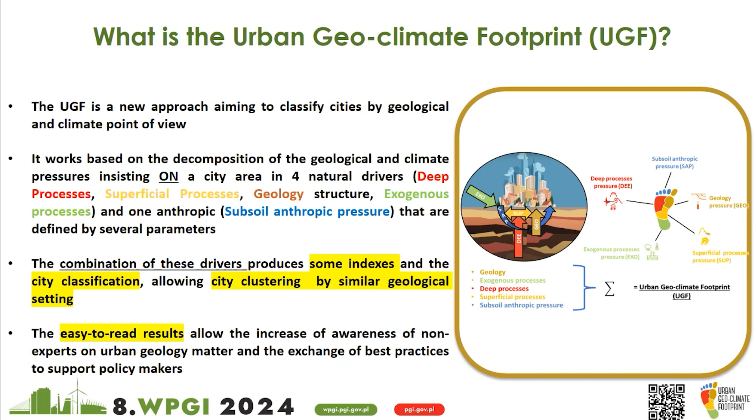The combination of these drivers produces some indexes and the city classification, allowing city clustering by similar geological setting. The easy-to-read results allow the increase of awareness of non-experts on urban geology matters and the exchange of best practices to support policymakers. So this is more or less a synthesis of what the urban geoclimate footprint is.

How it works: right now the tool is a common Microsoft Excel spreadsheet, pretty complex, but basically a spreadsheet. We have 7 different sheets. You can see the blue in the diagram represents the sheets of the tool.

The user navigates between the sheets and, guided by the glossary, defines the 22 parameters that are to be attributed in the tool. The final result is the city geofact sheet.

So you have not maps, not something to be used by an engineer or in a project. We are generally defining the geological setting of a city. You have a fact sheet, a user-friendly document synthesizing the calculated indexes, the geological setting, and the level of geological pressure on the city, ready to be shared with the public.

This is the city geofact sheet. This is an example for the city of Rome. You can see that there are some very simple descriptions of the geology or the city setting, some very general data, some maps, some cross-sections or 3D model.

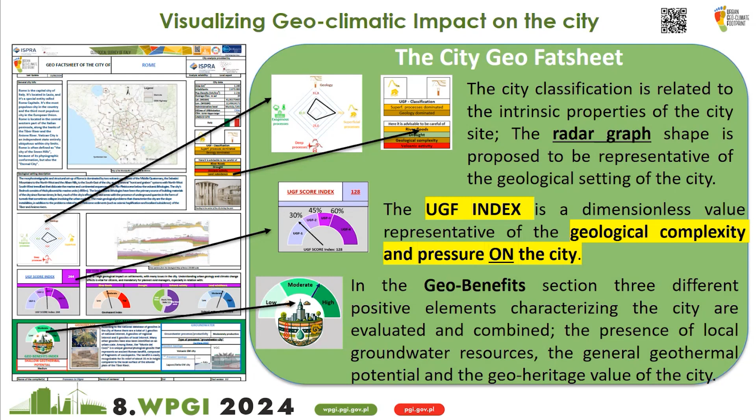Last but not least, in the latest version of the tool, we now have this space at the bottom that shows the geo-benefits. Why? Because we want to highlight that geology is not always a problem for the city, it can also be a resource. So we highlight here 3 main elements characterizing that city: the shallow geothermal potential, the geoheritage existence in the city, and the groundwater potential of the city itself.

This is the result right now of the analysis made across the European continent. You can see we have 41 cities analyzed across Europe, and the cities are pretty spread out. So we are pretty happy about this first result.

Obviously the work is in progress, so we are collecting more and more cities now.

You can see in this statistical analysis how the UGF score index varies from the lowest cities to the highest one. The lowest is Sisak in Croatia, and the highest is Naples in Italy.

You can understand why, and you can see the variability of the drivers, the value of the drivers. Some of the drivers are very spread, some are more or less staying around the same values.

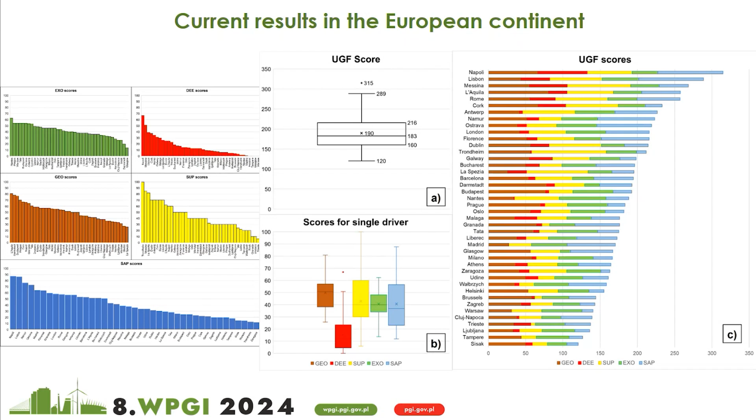This is exactly the aim of our project, our tool. All this I presented is available in this publication, pretty recent, in the City Journal. So you can download this open access publication and find all the features I plotted before.

Not only in Europe - Urban Geo Footprint is a tool not limited to European analysis. We integrate the possibility to extend the analysis also outside Europe, obviously referring to global databases. And we will soon receive some data from North America and Asian cities, also with the collaboration of other geological networks like CCOP for the Southeastern Asian countries.

In conclusion, the urban resilience strategies identify many key aspects for cities to increase their capabilities of maintaining their functionalities, notwithstanding the challenges they are subject to.

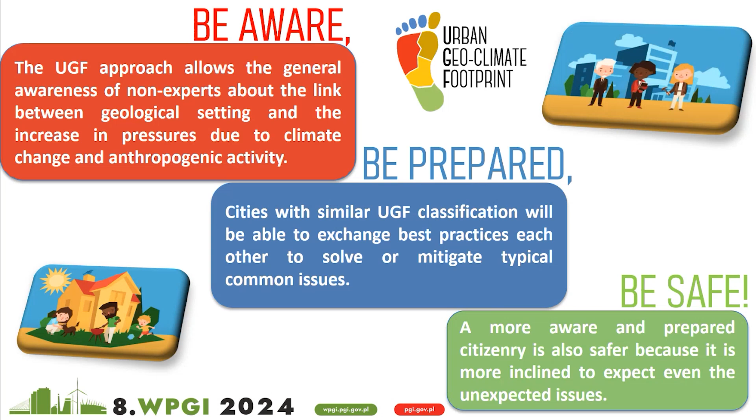Before thanking you for your attention, I just want to invite you to save the date of the 4th of December 2024. You are all invited in Brussels at the Royal Institute for Natural Science, where we will show the documentary we have realized in collaboration with other geological surveys about the urban geology and the urban geoclimate footprint tool. Thank you so much for your attention.

Thank you, Francesco, for your very clear presentation, and thank you very much about the Urban Geo Footprint method or tool, and also the city geo fact sheet. It's very useful if there are problems in cities as a base to use.

Thank you again. Okay, let's go on to the second presentation in this section, given by Iulia Prodan, president of ELGIP, but also active at the Technical University of Cluj Napoca in Romania. The title of the presentation is The Energy Below Our Feet and Its Potential for Urban Development.

Thank you, Peter, for the introduction. Today my talk is also related to urban development. I'm very happy for having the first presentation because it leads to the topic that is to come, which refers especially to the potential that the underground below our feet, the energy below our feet, holds for ensuring local renewable energy sources for our communities.

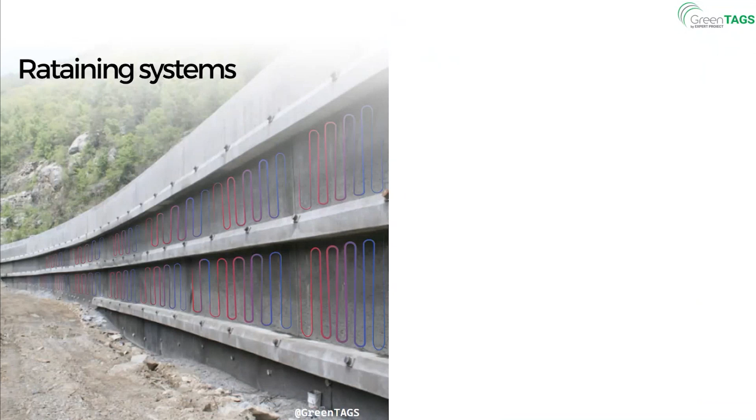So coming back, energy geostructures is basically, in practice, a very easy concept when you see it with your eyes. It's basically attaching a pipe system to the rebars of the foundation when it is constructed, and then connecting it to a heat pump, and it becomes the source for heating and cooling supply for the building. It can be implemented in a variety of types of structures, like underground parkings, metro lines and stations, retaining systems of large variety, foundation systems on piles, and so on.

Basically, the entire concept of this technology relies on the fact that soil is a magnificent shelter, which means that whatever temperature we may have outside, whether it's winter or summer, inside the soil we have a comfort temperature that we can leverage, and we can transform that through the foundations of buildings into renewable energy sources that are there locally and that could create independence in terms of energy for heating and cooling of buildings.

I would like to point out a major advantage of these types of solutions: energy geostructures are part of the shallow geothermal energy solutions. But the innovative part is that we do not need to make additional investments in creating geothermal boreholes or other types of investment in order to have this source. We need foundations for every building that we construct anyway.

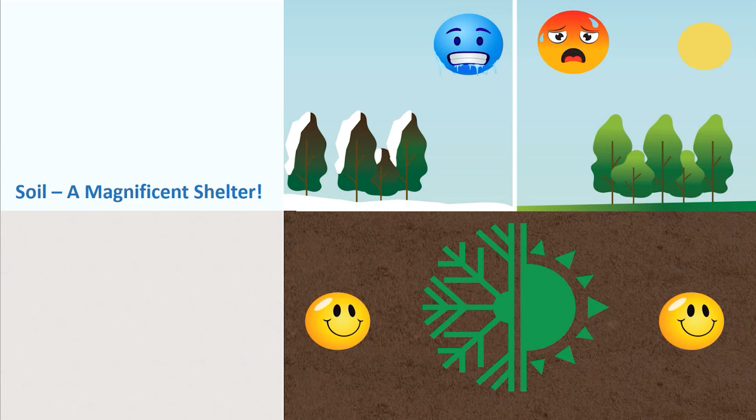So leveraging this potential of foundations and transforming them into renewable energy sources is an amazing added value from many perspectives, both financial, sustainability, and so on. What I would like to present to you, to show you the readiness of the technology, is the story of two hospitals that we have implemented in Romania with my company, GreenTAGS, currently the only company in Romania designing and implementing these types of structures, but also with the team from the Technical University of Cluj, because part of these projects have a strong research component trying to analyze the real operational behavior of these types of systems.

So the first one is really the first hospital, because they are both hospitals. The story started with the need for retrofitting of the existing building of the hospital, and then the need for construction of an additional building right near it. Through the geotechnical investigations, it was revealed that we have issues with the foundation soil: high compressibility and thick layers of that soil. So piles were the immediate solution for foundation.

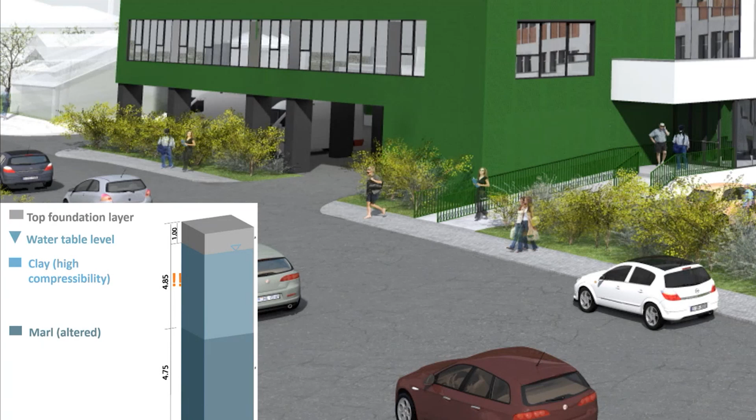What we have done is design a pile foundation, but a little bit more atypical than usual, with isolated foundations on piles. Usually we do these types of piles with a big slab, and then below the slab go the piles. But here, for a variety of reasons, including optimization of cost, we went with this atypical foundation system, and we designed 230 piles that we transformed into energy piles. They went up to 10 meters depth, which is quite shallow when we talk about deep investigations in terms of soils.

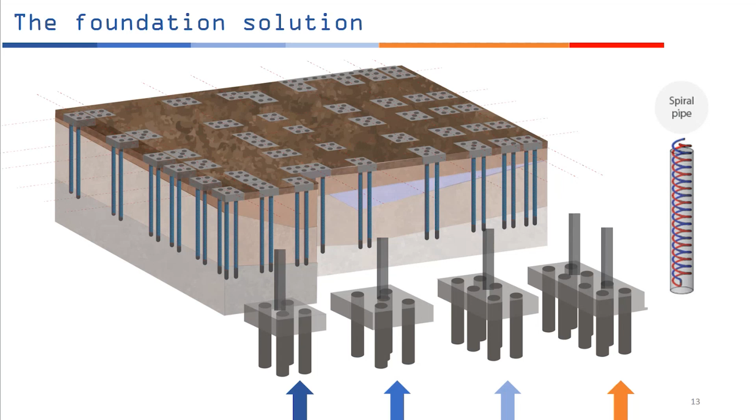However, it was more than enough to transform this foundation into the energy source for heating and cooling of the hospital. We had, due to architectural reasons, a variety of configurations, and then this was the concept, and we moved to the design stage.

Here I would like to make a parallel between what is needed in terms of input data for designing this type of system, and what we do in geotechnical engineering when we design this type of system. Usually when we design a foundation, we need input data, which is the geotechnical investigations, geotechnical parameters, physical and mechanical parameters of the soil. And this is usually what concludes the geotechnical design of a foundation.

Well, for energy geostructures, we have two additional steps. The next one refers to the energy design of the foundation, which means we need to quantify the amount of energy that the foundation can produce for the building. And the third one is to analyze the effects of having these temperature variations in our foundation from both a mechanical and an energy perspective.

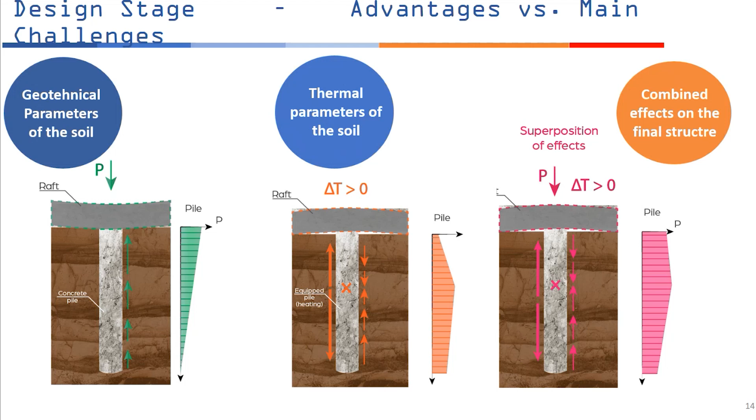So in terms of thermomechanical behavior, we have a superposition of effects. In terms of input parameters, in addition to the geotechnical parameters, having information from the soil regarding its thermal potential—thermal parameters of the soil, thermal conductivity, resistivity, and so on—is very important.

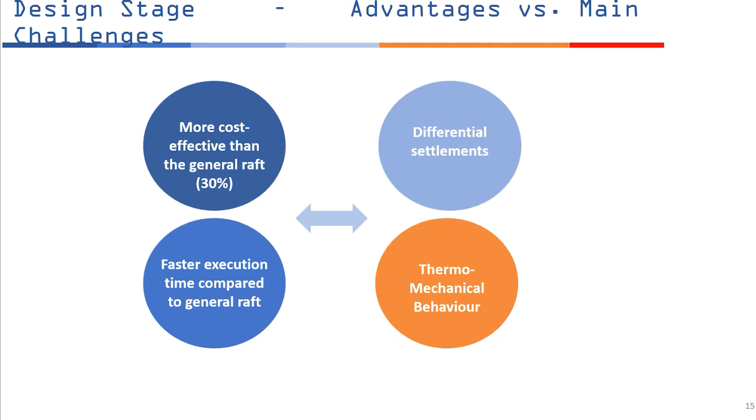Now, for this particular type of system, which was a little atypical compared to the classical one, from the beginning we wanted to make a correlation between the classical raft foundation and the isolated foundations. We also made some assumptions in the design stage, and based on the calculations, we managed to reduce the cost by more or less 30%, ensuring a faster execution. However, we came up with additional challenges related to the energy foundation system, in trying to understand what would be the additional differential settlements, thermomechanical behavior, and the energy performance of the piles.

Because when you execute geothermal boreholes, you have certain parameters and distances that you need to maintain between the boreholes in order for them to perform well from the energy point of view. In the foundation, the distance between the foundations and the piles is not given by this.

It's mainly given by mechanical reasons and structural design perspectives. This definitely influences also the energy performance, and it's something we assess in the design phase.

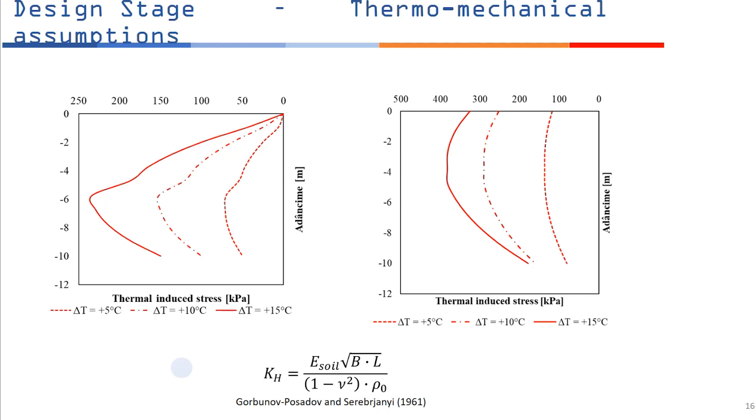All the calculations went in parallel for the thermal-induced stresses, and then also for the settlements, comparing the isolated foundation to the raft foundation. I won't go into the details of the geotechnical engineering, but in the design phase we did see differences in behavior between how the raft foundation on piles would behave compared to the isolated foundations.

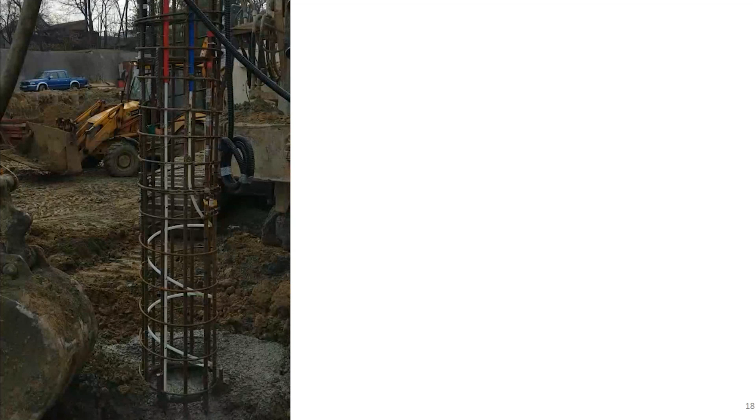As I mentioned, this was also part of a research project with the main purpose of trying to understand the real operational behavior of such a system, both in terms of mechanical performance, but also in terms of energy performance of the building.

For this, we have equipped 7 piles with sensors at different levels and pipes with different configurations, to try to assess the influence in terms of energy performance.

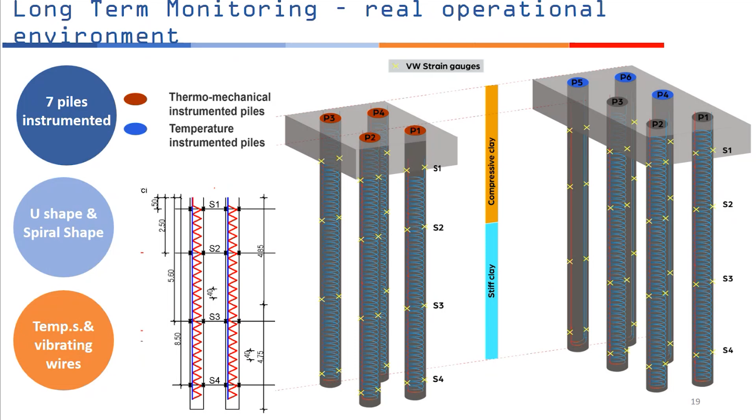Important to mention, this is the design, and then these are the results, first results after - we are now closing almost the 3rd year of the monitoring. We have learned a lot of lessons that draw us back somehow also to the input parameters.

How important the detailed investigation and the accuracy of the soil parameters is. We have seen also a large non-homogeneity of the soil during construction, and this has clearly impacted some of our assumptions in the design phase. But for sure, having accurate data on both geotechnical parameters and thermal parameters of the soil is very important.

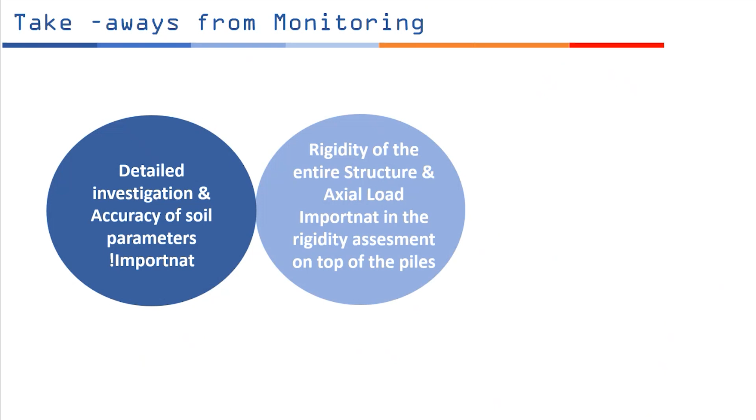Also regarding the rigidity of the structure - this was interesting for us to see - basically due to the rigidity of the building that comes on top of the foundation, the different types of foundation, whether isolated or raft or whatever, doesn't really make a difference in terms of thermomechanical behavior. So implementing the energy system doesn't really make any significant changes in the actual behavior of the classical foundation, which is great news.

Because to create a source of energy adds additional problems to the building.

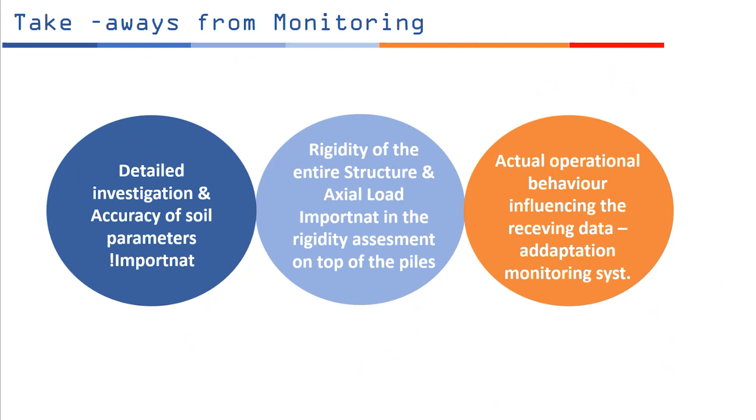That gets me to the continuation of the story, with the second hospital that came right on the right of the existing building, immediately after we finished the first one. So we finished the first one in 2019, and then we started the project for the second one.

Also part of the hospital, we started the execution last year, this time with a general raft foundation as the final solution for the foundation of the building. But basically what we managed to do in the end is to have two hospitals that have their own source of heating and cooling only through their foundation. So the foundation covers, for both of the hospitals, 100% of the heating and cooling demand for the operation of the hospitals.

That brings me to my final conclusion: yes, the ground for sure holds a huge amount of opportunities. The ground below our buildings is a great opportunity for creation of local, independent, renewable energy sources. Thank you very much.

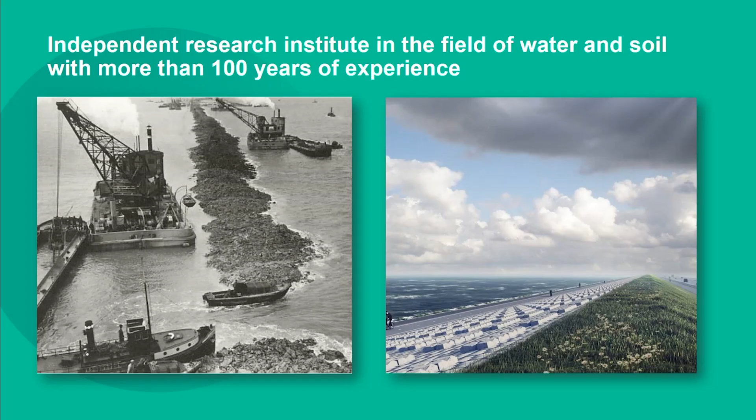If we look at Deltares more in depth, we work internationally and nationally. About 30% of our work is international, in Asia, the US, the Middle East, etc. We have small offices that connect us to our clients and stakeholders. We do projects for national governments, but also for the World Bank or European projects. We are about 850 staff, and about 200 of our experts really work on the subsoil. That is on one hand geotechnics - offshore geotechnics, dikes, road, railway embankments, underground buildings, pipelines. On the other hand, also applied geology and geophysics, and groundwater.

At Deltares we always say we have the people, the staff, the expert. That's the most important, but we also need good tools. One of them is research infrastructure, like the geotechnical centrifuge with an arm of 5.5 meters, used for geotechnical research. But we have many more facilities, also flumes and basins, etc.

Now I'm coming to these 3 case studies. The first one is a housing project in Almere city. It's a city on soft soil. A lot of times in the Netherlands we have soft soil - clay, peat, sand - and that requires a good knowledge of the subsoil.

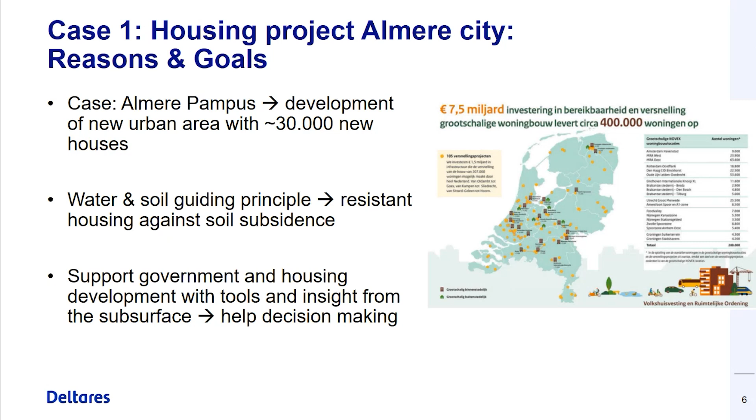We see 2 outcomes: first, it's a more generic methodology usable also for urban developments, and of course it helps with the master plan. The next step in this project is really going to what we call a digital twin - a larger scale operational model that describes the subsoil behavior and is used for spatial planning.

The second case is on sand extraction from the North Sea. The Netherlands have a long coastline, about 250 kilometers, and we want to keep it in place. So we do a lot of extraction of sand from the North Sea and do sand suppletion on the coastline to keep it there - it's a measure to protect our coastline. But it's also used for commercial purposes when building roads or other things. We see a lot of threats: climate change, sea level rise, land subsidence. These are all happening, and we want to optimize our extraction of sand from the North Sea. So then we get to some questions.

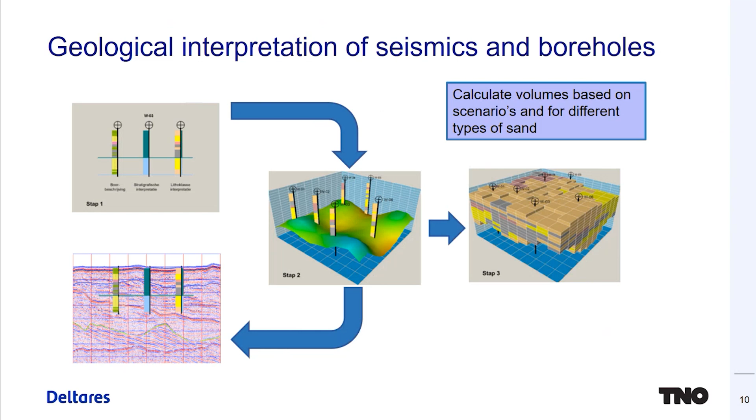So here we first of all use our database, the BRO database with all the geological borings that are already there from the North Sea. We have done a lot of seismic survey to determine the layering. And then we make this connection between geological layering and geotechnical properties of the sand. And then we build a model with that so we can calculate the volumes and the different types of sand. And then we get to the end result.

And then I get to my last case. This is a case about a canal in the Netherlands of about 25 kilometers or so. This canal is used for shipping, of course, and the canal was widened and deepened to allow for bigger ships to pass. After the project was run, we had a lot of damage in houses.

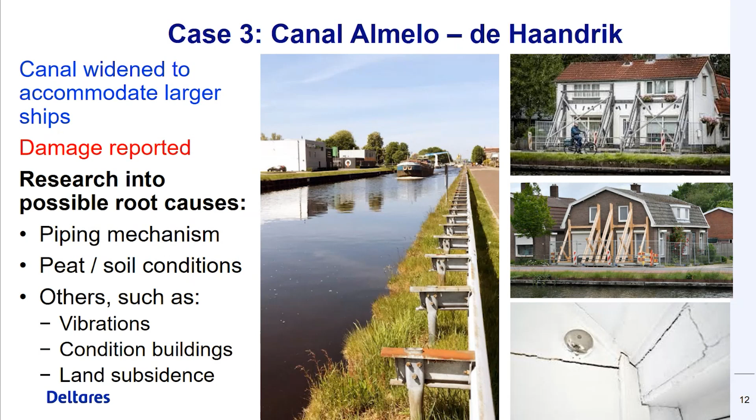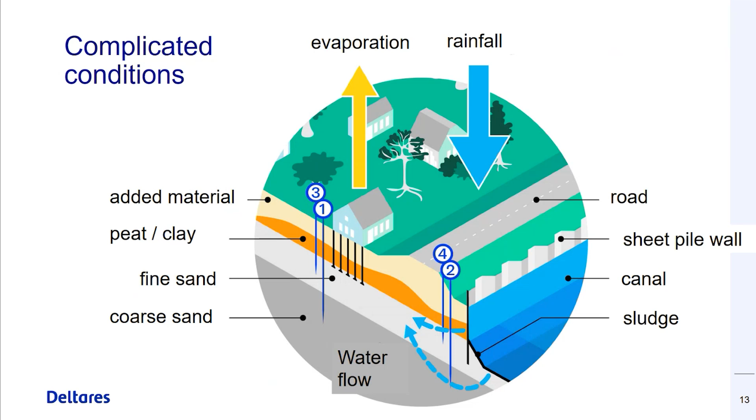So these are all the things that we have considered, and then we did a really big investigation into the root cause. We used again the geological database to get a first impression, but we also did a lot of additional work, like borings over here, laboratory testing. We even had, at 20 houses, made holes to inspect the foundation of the house and to see on what kind of soil the foundation was resting. And we also had a monitoring system for groundwater and groundwater flow. This was all used to look into the root cause.

What we could say is that piping was not really a problem, but we could see that a part of the houses was founded on peat. And because of the changes in the water, the groundwater, this did indeed influence the housing. So this led to a damage settlement arrangement between the local government and a lot of the house owners.

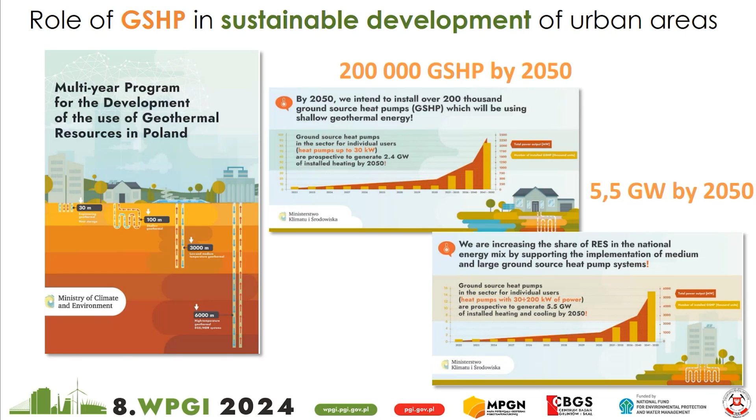In Poland, we have some problems with air quality and smog, especially during winter time, and air pollution due to coal heating can be lowered with the use of ground source heat pumps. To increase awareness, local societies should be informed about the benefits of ground source heat pump technology, and state-funded subsidies should be provided.

At PGI, we made a project called Shallow Geothermal Energy Potential Maps that helps to boost safe development of ground source heat pump installation. Many of you, I hope, already know this project. If not, please come to our booth where we can tell you about it and show how to use it.

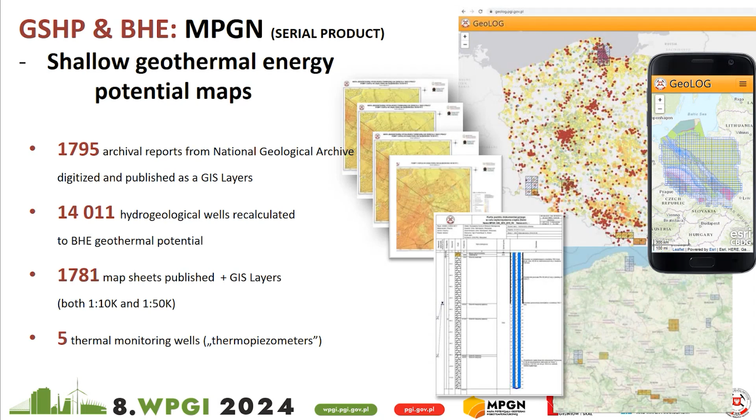In this project, we create various tools to estimate ground source heat pump potential all over the country, and we share it for free on our GIS website, where you can find maps and point data.

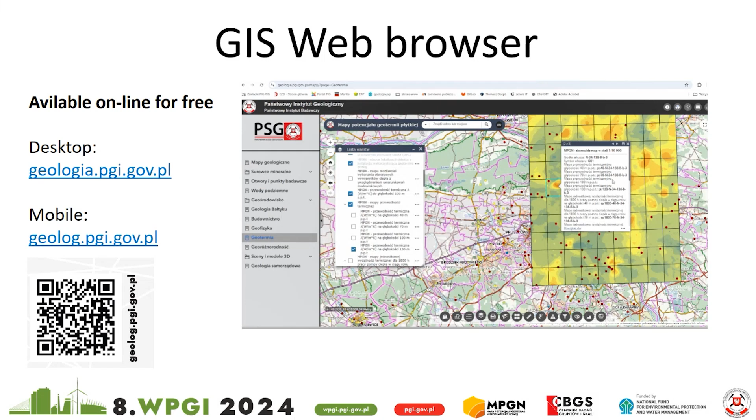This is our web browser, in which under the geothermal specific layer you will find all the necessary information, the point data and maps covering environmental maps and geothermal potential maps, with thermal conductivity maps at various depths. Here you can see the example of Warsaw. You can use them as a GIS layer, download them, or use them as an already given set of maps with all the necessary information.

When we talk about the workflow of this project, it's important to notice that these maps are done on the basis of 3D geological and geothermal models that are later parameterized with thermal conductivity, and then calculated using Python scripts in a cell of 25 square meters.

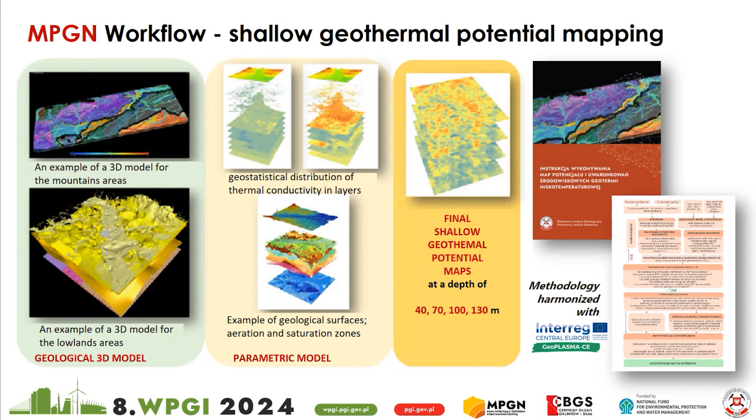The methodology of our project is available online, so you can download it and check it. It is harmonized with other Central Europe countries through the Geoplasma project.

Thermal conductivity parameterization is done by our team in the field and in the laboratory using different types of methods, mainly thermal needle and thermal disk, and also a steady state device. If you want to know more about the parameterization, tomorrow morning my colleague is going to give a presentation about thermal conductivity parameterization.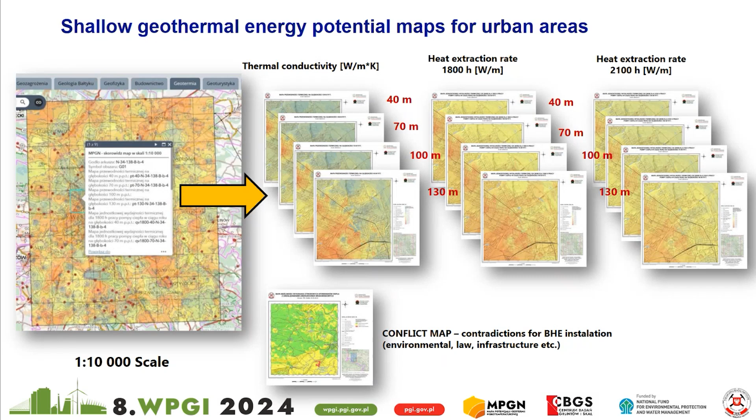Here you see a set of maps for the urban area of Warsaw. For each location, there's a set of 13 maps, including thermal parameters and conflict maps that show contradictions for borehole heat exchangers. So our role is also to increase awareness of sustainable development of this technology.

I want to focus your attention on the web browser with 3D models made by the Polish Geological Institute, where you will find 3D models made for different projects, but also for this specific project, the Geological and Geothermal 3D model.

This one is made for the area of Krynica in the mountains in the south of Poland, and this model is a grid model specially prepared for 3D visualization. In this web browser, you could generate virtual boreholes.

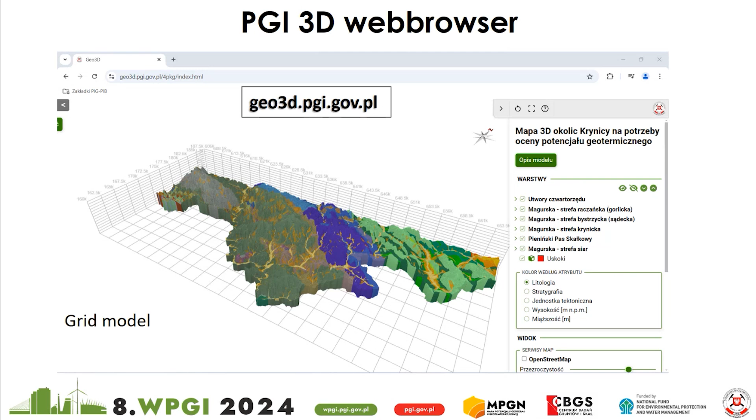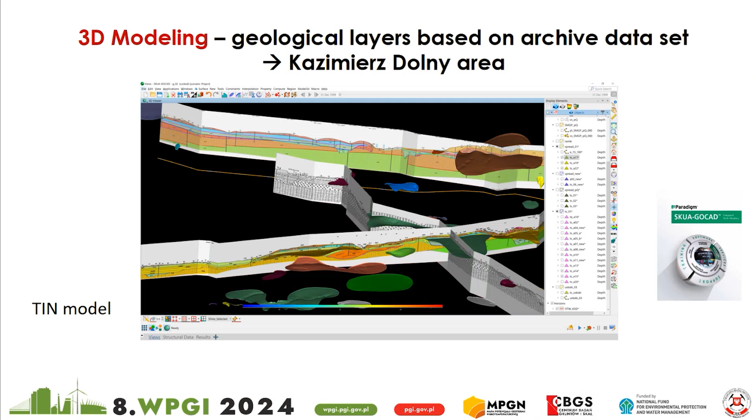You can check the geology in a particular site, or you can even generate geological cross sections in the given area. Here is an example of a 3D model done recently in the current project area. It's a TIN model, made of triangles in general, that allows us to visualize geology as good as we can. When you look at the different layers, you can see that we can model small layers and big layers interbedded, so it might also be applicable in engineering geology, where a lot of different layers are interbedded.

For areas where we don't have enough geological data, for example suburban areas where a lot of new housing is built and there's demand for ground source heat pumps, we try to fill in the gaps with geophysics, which is a very useful tool for drawing geological boundaries. We compare this geophysics at different depths, and use it as an additional tool to visualize geology.

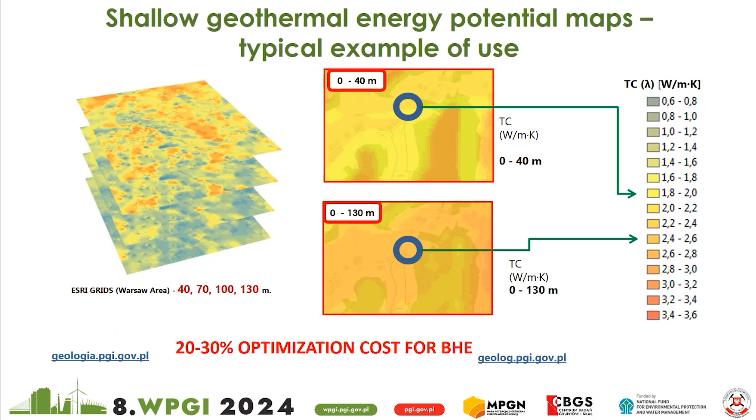But you have to be aware that this kind of situation, where thermal conductivity rises with depth, it's not always like this. Because sometimes with the rise of depth, due to for example a large clay deposit, thermal conductivity might be lower. So please be aware that it's not a rule.

Here's a case study of Warsaw, for which we have done our maps, and we have done the 3D model of geological and geothermal layers. In the area of Warsaw, you can examine the geothermal layers in every area.

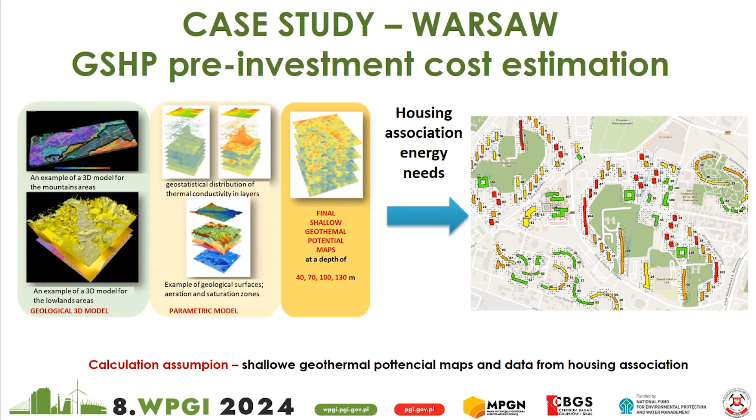We want to show how urban areas can benefit from the models we developed. Here is a case study of Warsaw with the pre-investment cost estimation for a very big housing association that decided to go into green energy. We have taken our models and our maps and thermal conductivity parameters, combined them with the housing association's needs, and we did the calculation that shows how much energy can be taken from the ground.

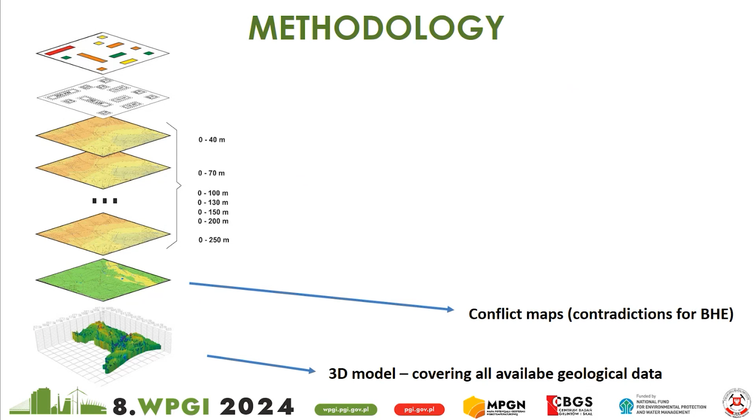So our methodology was to take our 3D model covering all available geological data, look at the conflict maps to see if there are any contradictions for borehole heat exchangers. If there are none, then we can follow through. Then we have taken thermal conductivity maps for standardized borehole heat exchanger depths, and combined them with the building needs we gathered from the housing association. We simulate a localization of borehole heat exchangers at the site.

What we got was building needs versus geothermal capacity, and we got different classes for each building. There were buildings that were fully accomplished with geothermal energy, and there were those who need more drilling or need extra energy sources for heating.

It's worth noticing, in Warsaw here you see buildings with the visualization of borehole heat exchangers. As you can see, comparing to the height of the building, it's very deep - it could be 100 meters, but it could be even 200 meters.

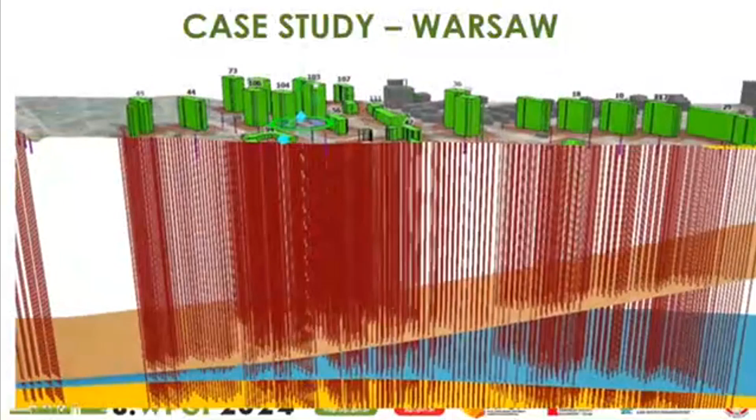As you can see in the city of Warsaw, where there are big differences in the geology, even within one area, the geology matters.

This is the last example of the use of our data. For those areas where there are no maps done yet, we have done a point map of thermal conductivity for the whole country. Here we can see a case study of the Łódź voivodeship that we are now working on. This is the point map with the estimation of thermal conductivity based on hydrogeological boreholes and its geology, and the standards given by the ground source heat pump association.

How can we use this map? Of course, more or less the same as the other maps, but it's point data. They can be used as a pre-investment possibility check, as an estimation of the potential of ground source heat pump either on site or over a big area, but it could also be used as a high-level input into high-level documents for urban development.

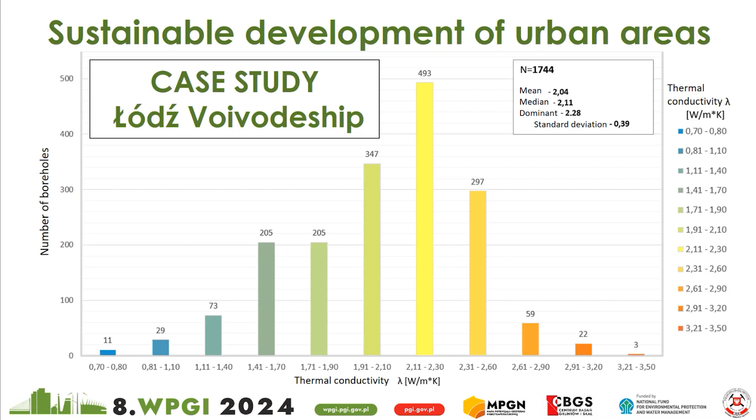The most common value is 2.1 up to 2.3, which is generally good for ground source heat pump. To sum up, shallow geothermal potential maps might be used in urban areas as a tool to improve air quality, as input to local renewable energy source development strategies, as a planning and cost optimization tool, and last but not least, as a tool for safe and sustainable development of the ground source heat pump market.

And that's all from me. As I said, if you are interested in the specific data or you haven't checked this data yet, please come to our booth and we will try to help you.

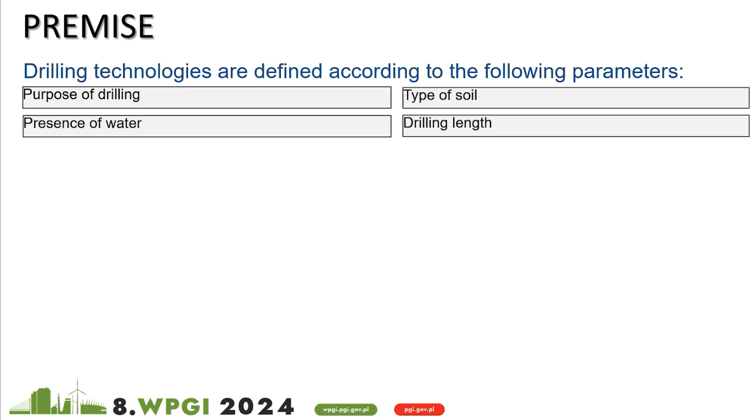Usually, drilling technologies are defined by some parameters: mainly the purpose of the drilling, the scope of the drilling, the type of soil that needs to be drilled, the presence of water under the level, the drilling length and diameter, the logistical working conditions that limit the dimension of the drilling rigs, and of course, the type of the tool that I have to insert inside the borehole - if I have to insert fiberglass, tube à manchette, micropile, tie rods, or monitoring instrumentation - and also the accuracy I have to respect regarding the deviation for the technical specification.

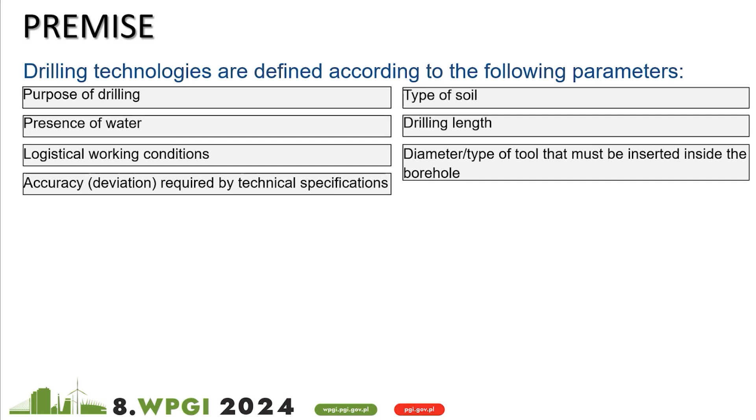Grouting mixes are defined by other parameters: the method and pressure I have to perform, the mechanical and physical features of the grout mixture, the water-cement ratio, which is a main parameter to follow, the automatic or manual control system of the grouting parameters - flow rate, pressure, volume mainly - the use of special components like special cement, microfine cement, pozzolanic and different types of mixtures, the use of additives, and the setting time. If I have to give a quick set to the grout, I have to use special devices and special additives.

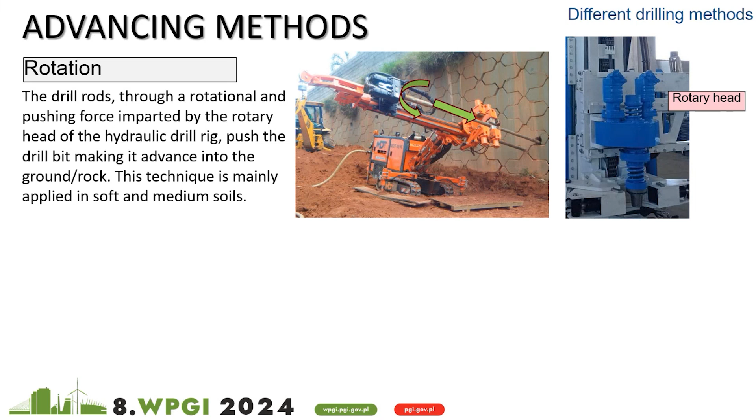The advancing method for drilling is mainly of two types - there are other systems, but I'll concentrate on these two. The first is rotation, where I have a rotary head and a chain that pull and torque the rods, transferring the drill bits inside the hole. So the rotary gives two movements: rotation and push. Otherwise, for different, stiffer types of soil, I need to introduce percussion.

The percussion is made by a hammer. We have mainly two types of hammer: the top hammer, placed on top at the rotary head, and for a more energetic system, the down-the-hole hammer, which is moved by compressed air - so I need to introduce a higher compressor on the job site. In this case, we have rotation, advancing, but also vibration and energy from the hammer.

The drilling fluid can be different in drilling - we can have different types of drilling fluid. We need the drilling fluid because it helps us transport the cuttings from the bottom to the top of the hole, and it also helps lubricate and cool the drilling and coring tools.

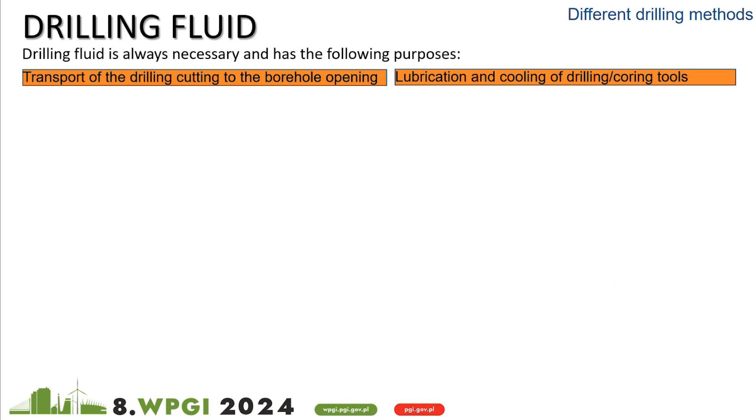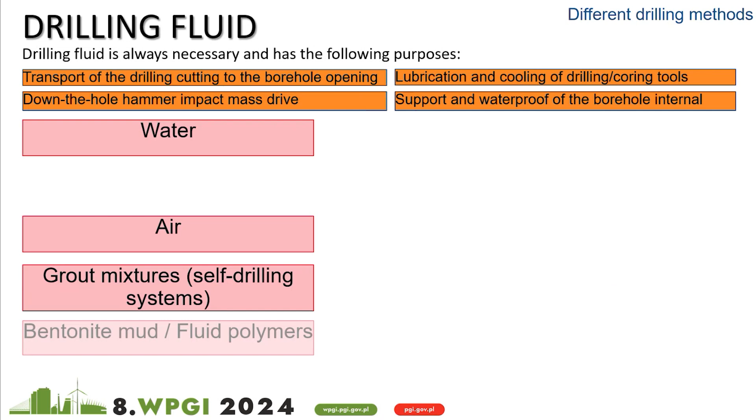We have to move, in the case of down the hole hammer, the impact mass that gives energy to the hammer. We have to support and waterproof the borehole internal walls. Generally, we can use water, air, grout mixture for self-drilling application, or bentonite mud or fluid polymer.

Water is usually used for rotary drilling with cutting tools, standard drilling without or with casing. We use it for core drilling, also for wireline application. We use it for jet grouting drilling, and also for jumbo drilling.

We use jumbo inside the tunnel to place instruments, but also to place dynamite for drill and blast technology. We use air for down the hole hammer application, but not only - also for rotary drilling in loose soil, we need the air to lift up the material sometimes.

We use grout mixture usually for self-drilling systems for tie rods, self-drilling, and also for the high pressure application of self-drilling that we call mini jet. Bentonite mud or polymers are used for water well drilling, geothermal drilling, and jet grouting drilling in some special conditions with open gravel and open materials.

We can drill without casing. If the soil consents, if the soil is stable, we can drill without casing. The drilling tools usually differ in function of the soil we have to drill, and also the feature of the soil, the drilling length and diameter.

We can use, for example, drag bits that are very cheap for soft soil - 3 blade, 4 blade, 2 blade. We can use tricone rock bit milled tooth for soft medium soil. If we need to improve the strength, because we have a weathered rock, we can use a tricone bit but with insert of carbide tungsten.

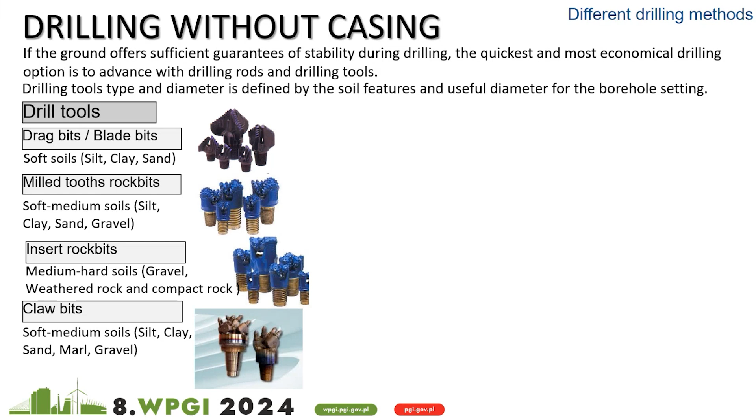We can use, in some cases for gravel and difficult soil, this type of claw bits with inserts that can be replaced. For rock, we have the possibility to drill with special plates of synthetic polycrystalline diamond that are very strong with great advancing performance. It is not cheap.

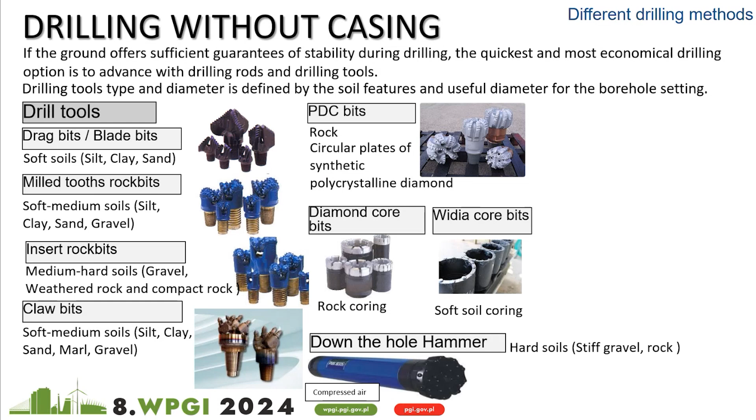If we are going to core, we can core with diamond core in rock, or with the carbide tungsten insert core for soft soil coring. If we want to use the hammer, as we told, we have down the hole hammer with compressed air working, or top hammer hydraulic working. Here we have some reference diameters that we can use.

If we want to drill in different soil when we cannot use the single rotating mode, we have to use casing pipe. So if we have problems of stability, we have to use casing pipe. What does it mean? It means we have to use a dragging system to perform the drilling using the drill rods, but also using an external pipe that I leave inside the hole.

To place inside that my instrumentation, my pipe, my drain, whatever I have to put inside the hole. We have several systems. The main one can be the dragging from the external part, and this can be applied with rotation or rotopercussion system.

We can use, for top down the hole hammer, eccentric system to make rotate the rods together with the external casing. We can use another system in which we drag from the bit the casing without rotation, rotating only the inner part with the hammer.

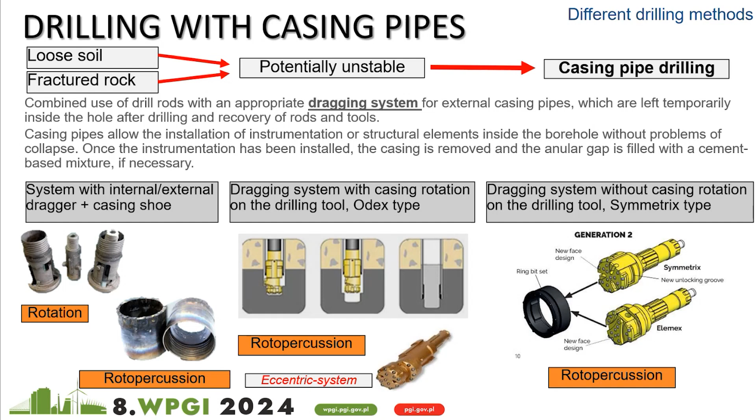This is a Symmetrix type for rotopercussion, but we have a huge, wide production on the market that we can use.

The choice of the drilling diameter. This is a table that we work on in SISGEO, because our application needs to decide, in function of the instrumentation, the correct system and the correct diameter to apply. So this is a list of all the cases of instrumentation that SISGEO needs to put inside the hole.

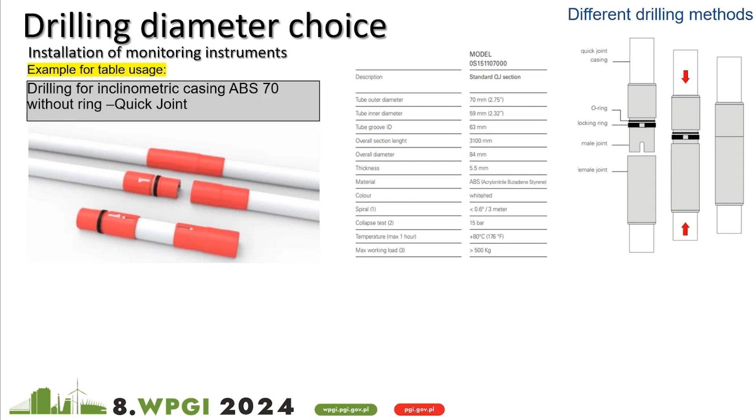Now I don't want to read you the table step by step, I want just to give you a sample of how to use it. This is a table available on our website and in our manuals, so it's free for everybody who wants to know. The case: we have to set inside the hole the casing ABS 70 for inclinometric application with quick joint.

We have to check on the datasheet, and we will see, together with the table I showed you before, we have a diameter of the pipe. We have the diameter of the joint, and we can find them inside the table.

The diameter of the pipe is not relevant, because we have to consider only the bigger diameter that we have, which is the diameter of the joint, 84 millimeters in this case, on which I add the diameter of the grouting pipe that you have to consider to put inside the hole together with the casing. So the total real diameter for our consideration is 104 millimeters.

In case of drilling without casing, we can give minimum diameter and suggested diameter. In case of drilling with casing, I can give you, but the solution, a minimum diameter and a suggested diameter, of course.

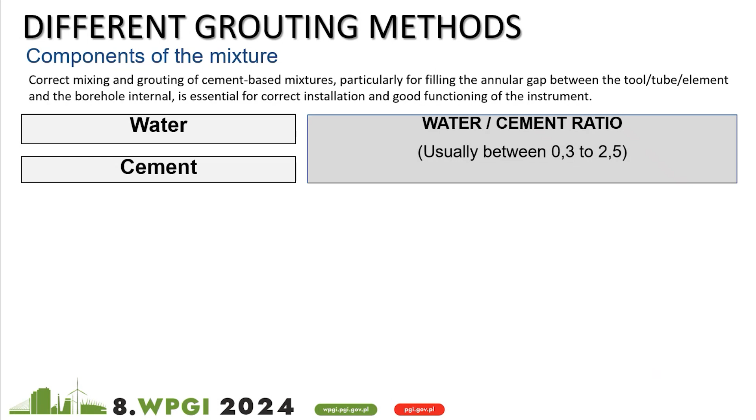If we want to pass to the grouting method, we have to start discussing the components of the mixture. We have generally two components that produce the grout: water and cement, usually managed by the water-cement ratio, which in my experience is close to between 0.3 to 2.5, but we can find different values.

Sometimes we have to add bentonite mud, which we need to pre-hydrate to give the features of bentonite to the mixture: plasticity, stability, etc. We use additives that can be accelerating or retarding, or fluidifying, especially for mixtures with a very low water-cement ratio. We can also use expansive additives, polymer and stabilizing additives.

Usually grouting mixtures are defined by parameters that we check after mixing. The water-cement ratio is input data. The percentage of bentonite on cement is another input data. The third input data is the percentage of additives on cement. Each of these components has a specific density that we use to evaluate the feature of the mixture, which we have to collect and get.

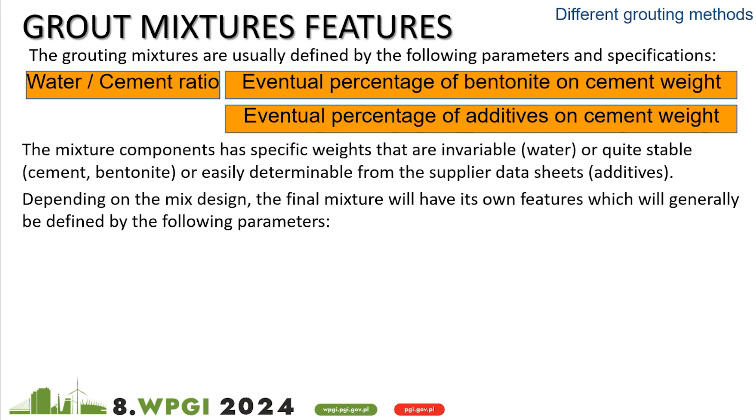How can we check? With three methods. The specific weight can be monitored by mud balance, measured as density in kilograms per liter. The viscosity can be checked using the Marsh cone, which has a small calibrated nozzle on the bottom, measured usually in seconds. And the bleeding, the percentage of water that separates after some hours from setting, is measured by a graduated cylinder and expressed in percentage.

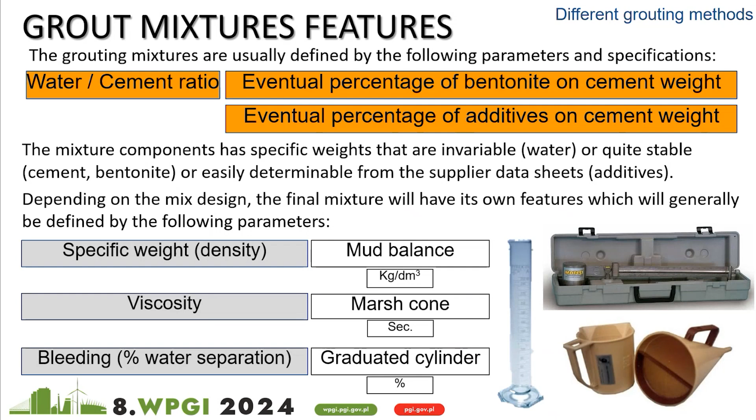The mixing starts from a mixer, of course. The mixer is usually like a tank with a shaft and blades that rotate from 10 to 80 RPM, but I suggest a different approach and better solution.

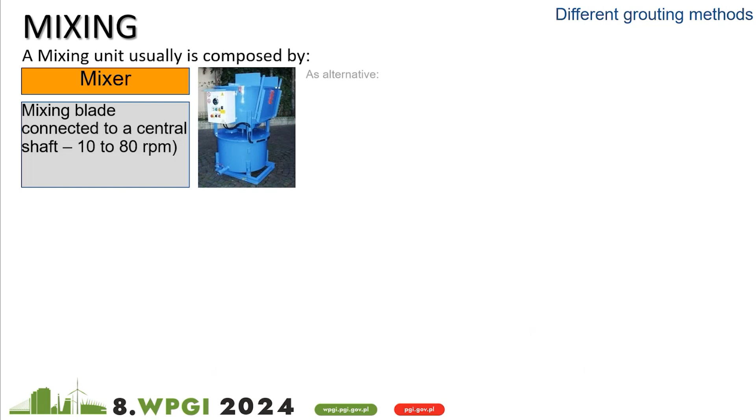The turbo mixer is in the same situation, another tank, but without a blade — instead with an impeller pump creating high turbulence that recirculates the fluid and powder inside the tank. We get better quality of mixing.

We will have less mixing time. We have the possibility to work with silos, placing load cells under the feet of the turbo mixer in order to weigh what we are going to mix.

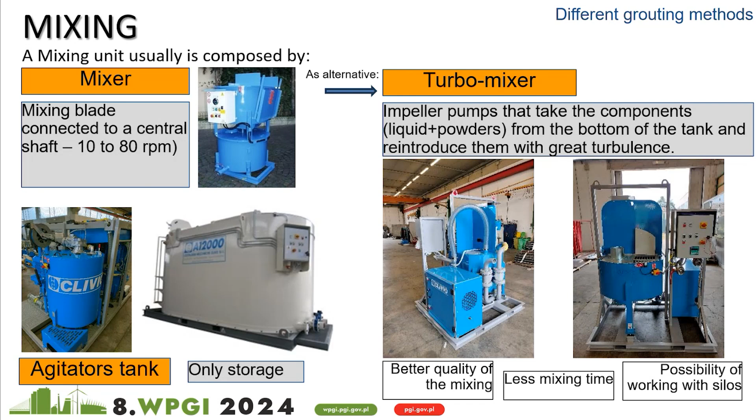After the mixing, the grout mixture goes to agitator tanks only for storage, to avoid separation and segregation of the components. The pumping depends on the purpose we have to accomplish.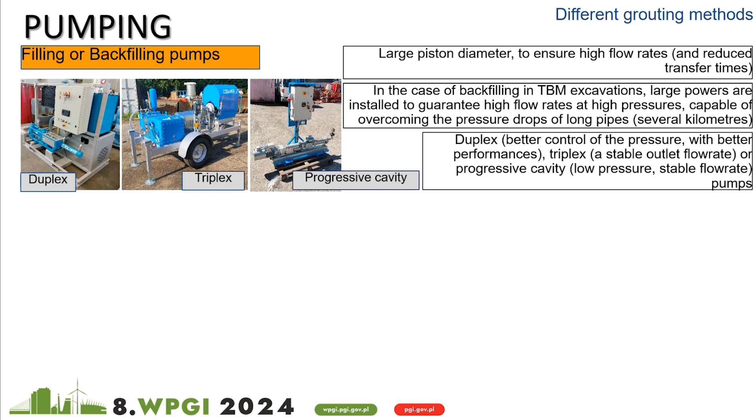In case of backfilling, we also need to guarantee high pressure because we have loss of pressure along the pipeline. We also need management of the pressure and flow rate of the pump in order to control it during the pumping activities.

If we are doing grouting or waterproofing activities, we need a smaller diameter plunger pump. In this case, duplex plunger pumps are the better option: small pistons for better control of parameters, hydraulic control of the valves, flow rate and pressure, and the possibility to control these parameters through electronic devices and data loggers.

If we are going to perform jet grouting or mini jet, we need a special pump on site. The jet grouting pumps need to reach up to 450 bar, the mini jet a little less, up to 250 bar.

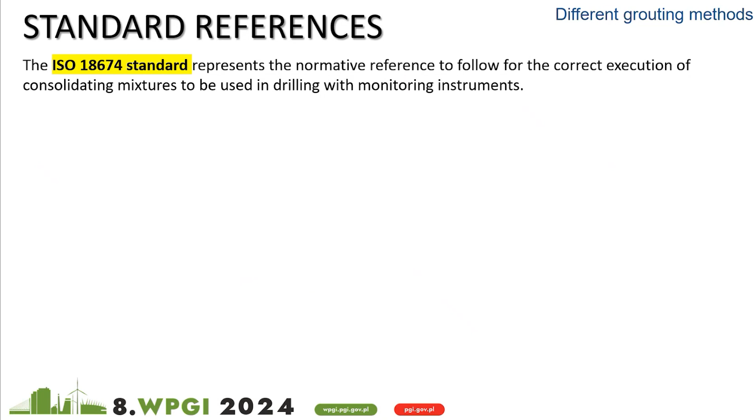For application inside the hole and for grouting activities in the setting of monitoring instruments, we have a good ISO standard that helps us manage this operation. It gives us many key points.

We can use additives. Each type of additive can be used, but we have to first analyze the induced physical and chemical effects. This is very important because this evaluation needs to be written clearly in the installation report.

The standard gives us some mix designs in order to make grout with features similar to the surrounding soil, which we have to investigate.

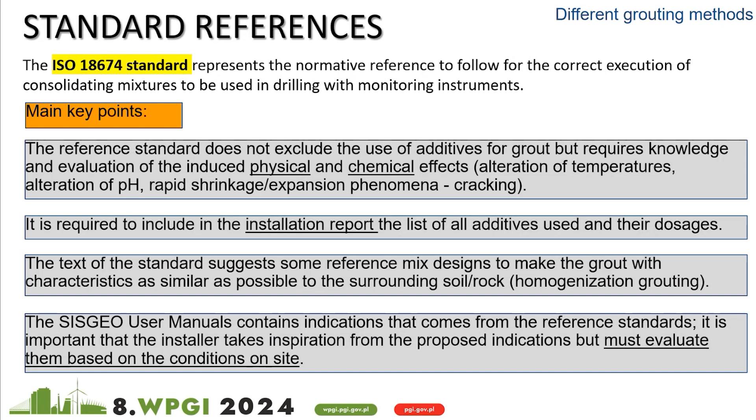We can follow this indication, but the ISO standard recommends using experience and our knowledge based on the conditions we have on site. So don't forget that you are the best judge for the application you are going to perform.

The controls of the parameters: before installing the instrumentation, we can check some parameters just during the drilling and grouting activities.

We can collect some very important information that are interesting if we want to cross that together with the monitoring instrumentation data we collect after. The first one I suggest is the DAC test, which we can also use for core destruction drilling. It means I have to record and consider all the drilling parameters: advancing rate, speed, the rotation torque of my drill rig, the push I have to apply to drill, and the rotation speed. Crossing all these parameters, we can calculate the soil-specific energy and represent it on graphics for each layer we drill through.

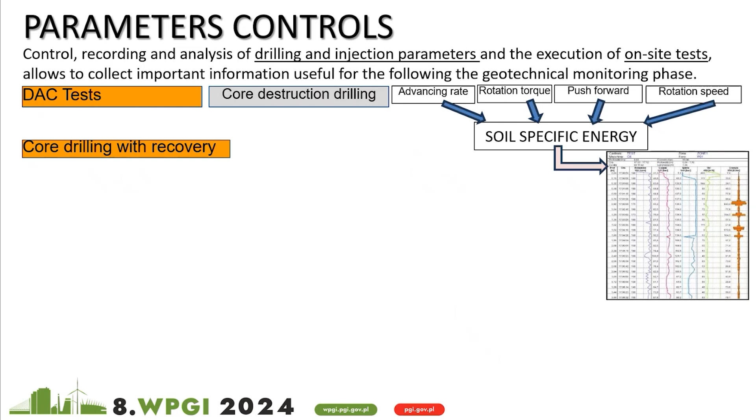If we want to see what happens inside the soil, we have to recover the coring in the box. We can give a stratigraphic description, and rock quality designation for the description of the quality of the rock or materials. We can make preliminary tests on samples, and collect samples to send for laboratory testing. We can make surveys during the borehole drilling progress - usually in wire line systems, but also in standard coring systems. We can do dilatometric tests, video photographic recording, temperature control of the water, permeability tests like Lugeon and Lefranc, and we can also install instrumentation, typically from SISGEO, but not necessarily.

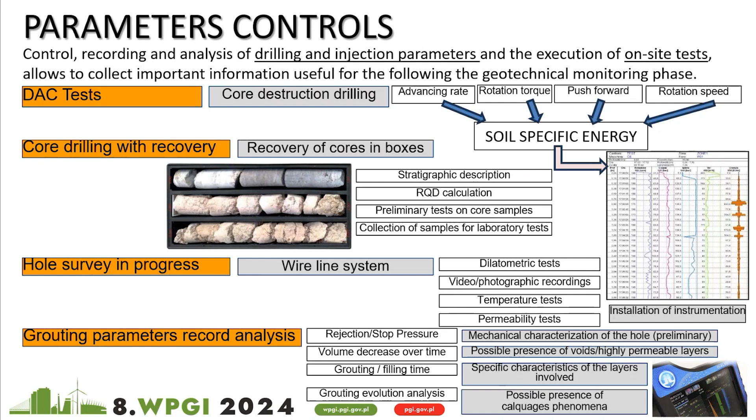The grouting parameters record gives us information about the feature of the soil, and the stop - why the grouting stopped. It gives information about the mechanical feature of the rock we are grouting. The volume decrease over time can give us information about the presence of voids or high permeability layers. The grouting time and filling time give us information about the layers, and the evolution of pressure, volume, and flow rate during grouting can give information about the possibility of the claquage phenomena.

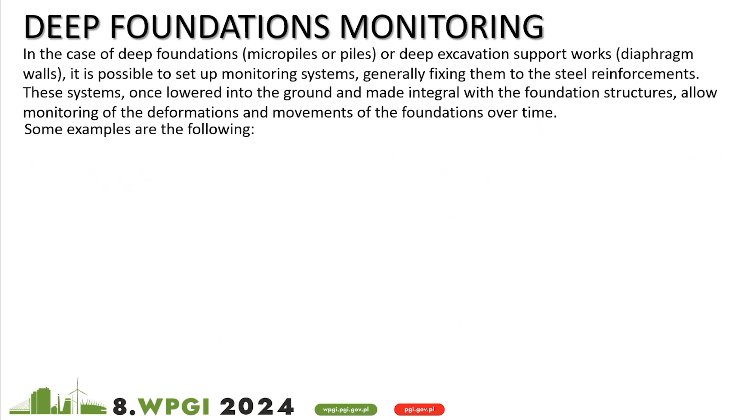We can apply monitoring systems also in foundations, when we work on 3-4 cases. Inclinometric pipe can be placed together with the cage for monitoring of the diaphragm wall or piles. This deformation control during excavation phase, for example for car parking or subway, gives information about the deformation we have. We can place strain gauges for a compressed element - the deformation we collect gives us information about the compression load. Load cell can be mounted also in a tensile effort, but working for compression effort. So in tie rod, we can apply load cells that give us information about the state of the anchors during the time.

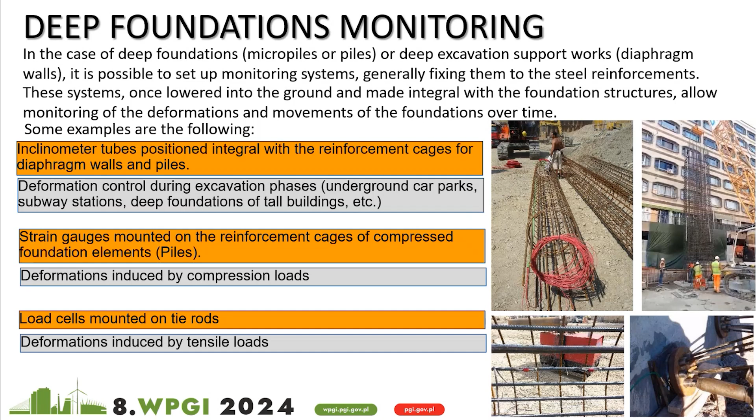The conclusion is easy, a very simple message: the accuracy we put inside the technology for the production and testing of the system we bring on site for geotechnical monitoring is not useful if we don't put the same care, attention, and overall view into the application of this instrumentation inside the soil. These are a couple of elements that need to work together - otherwise we cannot guarantee a good solution for a long time. So, good instrument for good application.

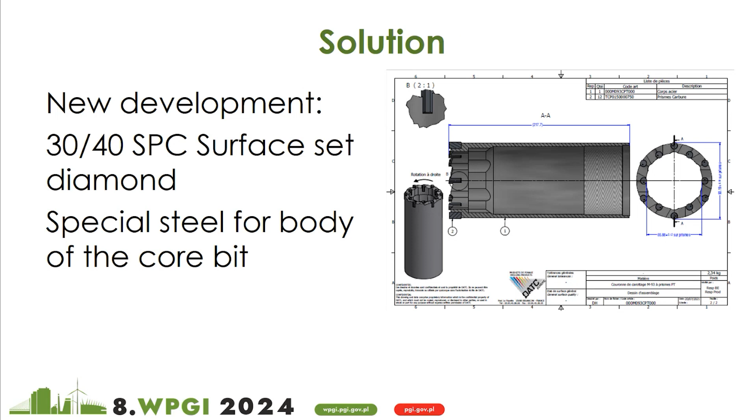That was a small example from 1995, 1996. Then the example from another year - we have the PRGW company, now a new name, United Oil Well Services.

They asked us to build a special core barrel to work on deep holes for gas storage in salt and for exploitation of the salt. The location was Góra near Inowrocław. The problem was that they had the sample, but because of the long process, this sample was destroyed by the time it reached the surface.

So we increased the drilling using the special core barrel. That was the first PWL 165 millimeter, and later on CSK 165. We increased the speed and we increased the quality of the core. Let's say that was the heavy duty core barrel working until now.

We also multiplied this project. We worked in Romania, we worked in Austria for the Salinen mine. The core barrel is special, up to 3,000 meters. Our record was 2,800 meters. This is an example where we started from a simple bit, and after a few years we were able to produce a professional deep hole core barrel, of course with our partners from France, and that's the result.

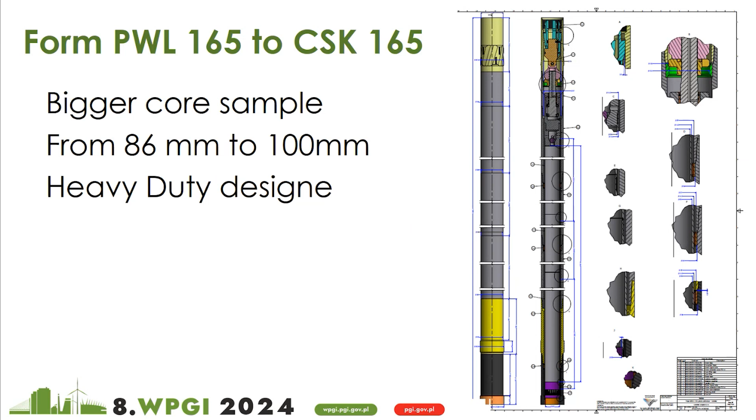You can see the core sample, and this was not pieces, it's a full piece. On a 9 meter length core, we have 2-3 pieces. Even sometimes we got 1 piece. So then it was the process for the geologists to cut it, to pack, to store.

And then the last example of our cooperation, it's a cryogenic core barrel. In the modern town we have geological, geotechnical problems. There's a lot of polluted area with different pollution, and to remediate it we need a proper sample.

In this specific condition, the question was to have the sample with the real gas content. There was a couple of gas, but the problem was when they analyzed this underground in the hole, they had specific gas contamination. When they put the sample to test in the laboratory, that was half of this, even less.

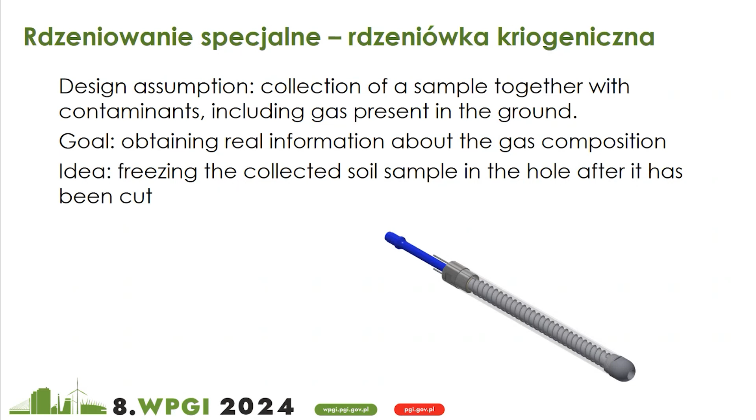Then after sampling, we put the nitrogen and cold to make a frozen sample. Of course the structure of the sample is destroyed, but because of freezing the sample, we have the full set of the pollution that we have in the ground.

So this is the drawings, and that's what I would like to show. It's not so many things, but this is our target - what we are doing, to be always professional and to work with our customer, and to deliver not only the product, but the know-how and the support.